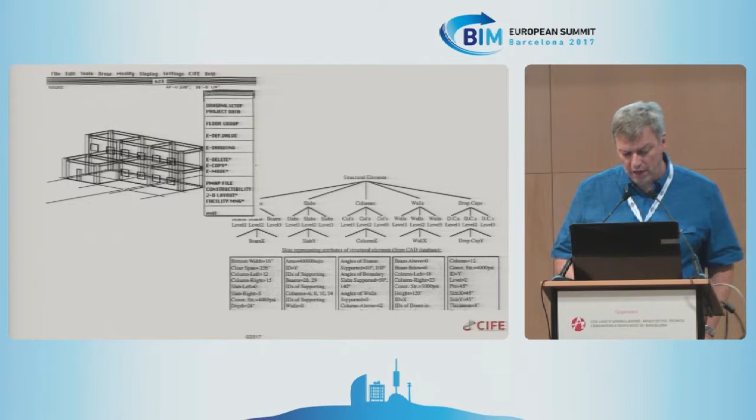We got to work on a real project the first time in 1993, when we were asked to help that hospital project that was being renovated while it was fully occupied. We were able to use a 4D model. So for that we had to build a 3D model, of course, even though the hardware and software was incredibly expensive, $50,000 in 1993 money.

Imagine if you extrapolate that and go to your project director and say, I need this much money to just build some kind of model. People would laugh at you today. But that's what the project manager invested in, and actually in the first sixth of the project, we paid the money back, just from the mistakes we found. So we realized the power of a model and the related visualization to inform a team very rapidly and allow the team to do a better job.

So a few years later, we had a benchmark project in our area. It was the first time, in 2004, that a client, Sutter Health, a company that builds lots of hospitals, said if anybody bidding or wanting to work on this project must work in 3D, share the 3D with all the other disciplines, and must use lean management methods.

Otherwise, do not apply. So that's where the companies realized it was actually beneficial to have people working together instead of making separate models, like the mechanical guy, electrical, etc., bringing them together once a week, finding lots of clashes, having to redo a lot of the work you had done. Okay, it was better than the old way, but it was still a lot of waste.

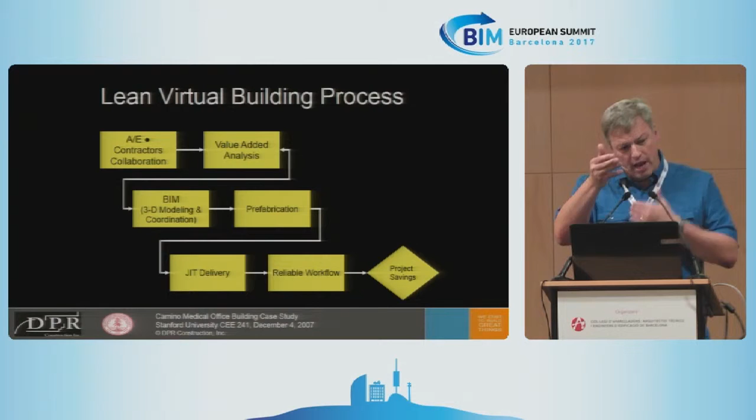So they adjusted the process on this project by having much more collaboration between the design and construction team, this back and forth, which you see with the double-headed arrow on the upper side. And then once the designers and builders were happy with the design, they could execute it very fast because they could fabricate from the model, deliver it just in time, and this led to a much more reliable workflow, which led to project savings.

And this is what the people were really interested in. They were wondering, is this any better? This was a medical office building. There were many of those being built at the time, so there was lots of good reference data, and this project was completed 6 months faster with a 9% lower cost. So people took note. They said, okay, this may be a good way to build.

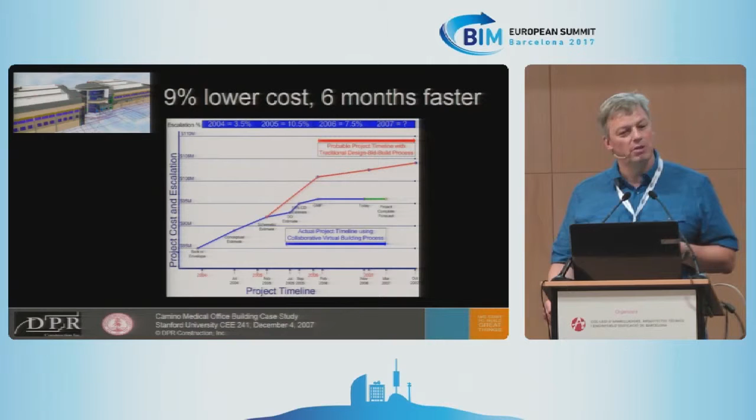This led then to the next project that was done between 2008 and 2012, a hospital. I think this turned into the first hospital in the United States where the client got the entire scope that he wanted, on budget, not for a penny more, and 30% faster than a comparable hospital.

And so this showed for us the power of what we call virtual design and construction, because we have the objectives, the targets that the project team needs to meet from the client perspective, and also from the project team's perspective. They had to make sure that the construction was highly reliable, but that's not just the contractor's problem, that's the whole design and construction team's problem.

If the designer doesn't create a good design, then you cannot have reliable construction. If the designer doesn't finish design during design, you cannot have reliable construction. And so often people tell me, well Martin, this modeling is very nice, very good, but we're in a hurry. We have to start building, so we can't finish the design.

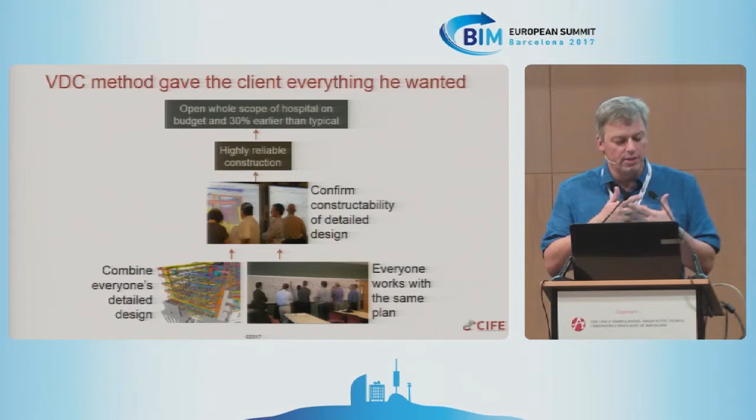Well, this project finished 30% faster than comparable, and they finished the design during design, so that there were basically no changes during construction. So it really required bringing the people together, or the disciplines, when it really mattered, to confirm the constructability of the design and to adjust the process to take advantage of the ability of people to work together, make decisions, and supported by a very detailed BIM.

On this project for the $300 million hospital in 2008, they decided to model everything that was 1 centimeter or larger. Because when they started the project, all the parties looked at each other and they said, so where have we had problems in construction before?

Well, the problems were always with the things that were not in the BIM. The things that were in the BIM, we rarely have a problem in construction. So why would we be silly not to put basically everything into the BIM. So that's what they did.

So this is sort of a very rapid journey that we were able to be part of together with industry, otherwise we couldn't make it happen, from over 15 or so years, to move from BIM as a technology to bring it together with the people and the process and new targets, aggressive targets, which then creates what we call virtual design and construction. So why, in my experience, is BIM so powerful?

This is a case from a project in Germany, Neumarkt, by Max Bögl. It's a mixed-use building in the center of the town. And they were worried a bit about really being able to create a high-performing building. Are they going to reach all of the targets that they set themselves for this goal, for this project, which were pretty aggressive?

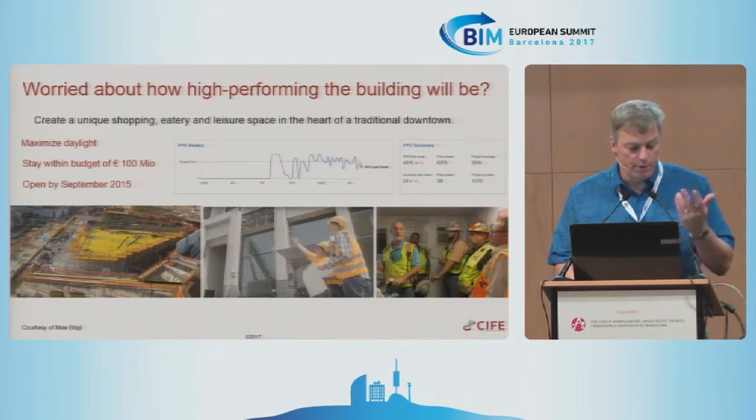So they realized as they were looking at how the project was going that better collaboration could improve the project. That's true almost everywhere in the world I've had the pleasure to work. And then when you look a little deeper, you realize that collaboration is, in part at least, not as good because the project information is a mess.

We've talked about that before. Everybody has their own list, everybody's in a hurry, and then we spend time comparing lists and what have you. And then you realize the project information is a mess because the processes, the workflows haven't really been defined well, or actually not as good as they should be.

So then where should you start improving? You could say, well, start at the root cause, fix the processes. And in some cases that works well, but I found it's really difficult for the people to imagine new processes without having experienced something different. So you could start improving collaboration, because that's what you in the end want to improve.

That's also difficult to do, because why should people all of a sudden work together better, trust each other more? At least I haven't seen that happen. I cannot think of a culture or project where this was the case.

So I have found that starting with the information, starting with visualization is a great way of getting people to work together, start to trust each other, start to solve problems together instead of pointing fingers. Eventually they realize they need to change the processes, and then they're able to do it.

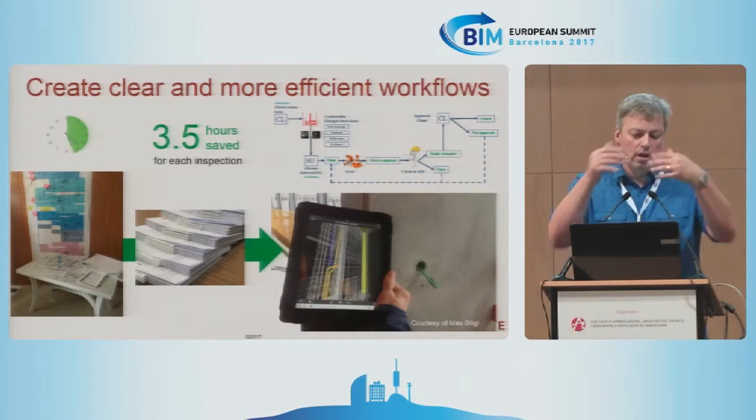So in this project, they started to create shared visualizations to understand, for example, how different options affected the daylighting, and how they would fabricate the project. Through that, they started to work together more, which allowed them to create new workflows and processes that leveraged these tools and started to measure. With that, they saw where they needed to improve.

And in the end, they were very proud of the high-performing building that they had delivered. They were able to create a very high-performing shopping mixed-use project by having gone through this process.

So what you see here was mostly the power of visualization to bring the project team together.

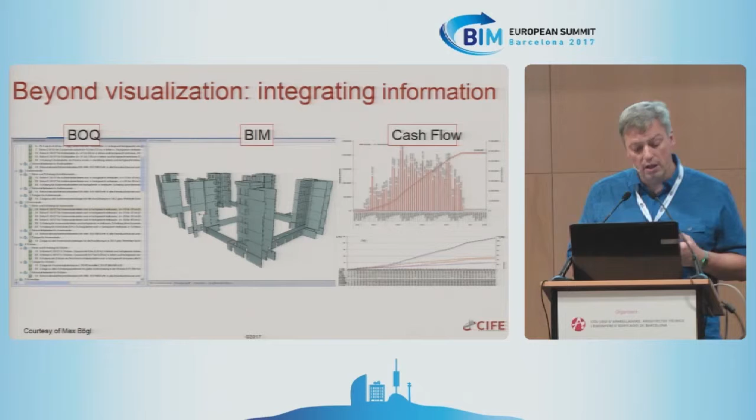Of course, there's more to BIM. They also realized that they could leverage the information in these models to, for example, connect with cash flow. And they also had the idea for another project: once you have a computer representation of your building, you can start to automate it. We saw some examples earlier already. So they created scripts to almost automatically create, for example, a parking garage.

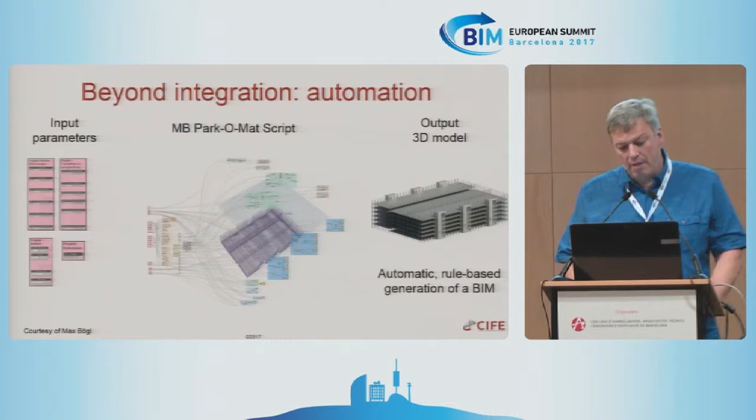So the first sort of BIM, BAM, boom in terms of doing more with BIM is understanding that we have these three types: we have the power of visualization, the power of information integration, and the power of automation. I think on any project today, you should have a strategy for which decisions, which tasks you're going to support with a visual BIM, an information-connected BIM, or with automation.

And so, as you saw, BIM is an essential part of virtual design and construction, together with adjusted processes, bringing the teams together. We call it integrated concurrent engineering in support of project and client objectives.

So we had lots of these anecdotes from projects, these examples, and we were asked by Wiley to write a book, initially on integrated project delivery. We changed it to call it integrating project delivery, to highlight the need for everybody to work on integration—that it wasn't just a thing you could buy, you had to work on it. So we wanted to highlight the active part.

And the book brings together many experiences from practitioners collected by the two authors, who work at DPR, a leading construction company in our area, and Howard Ashcraft, one of the leading lawyers in relational contracts—not contracts that keep people apart, but contracts that bring people together—and then us at Stanford, in terms of the research we've been able to do.

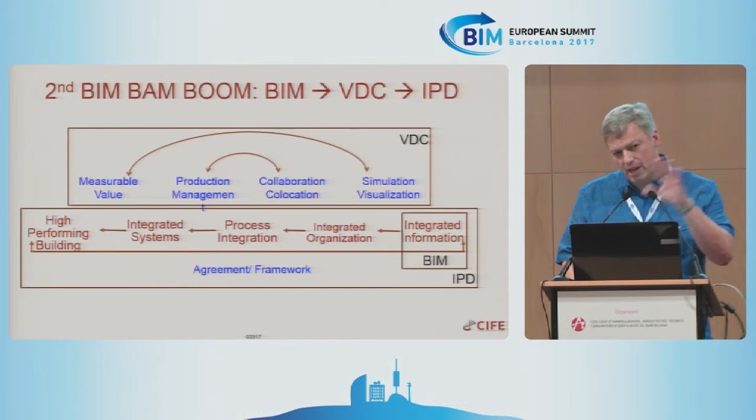So this is sort of the second BIM BAM boom: from BIM to VDC to IPD. Because you have IPD, right, represented here, and if you look carefully on top, the methods, they are all the methods in virtual design and construction, the definition of the objectives, the collaboration of the people, and then the revised, better managed processes and the information on the basis, the simulation visualization on the basis of BIM. So hopefully this allows you to connect these acronyms a bit more.

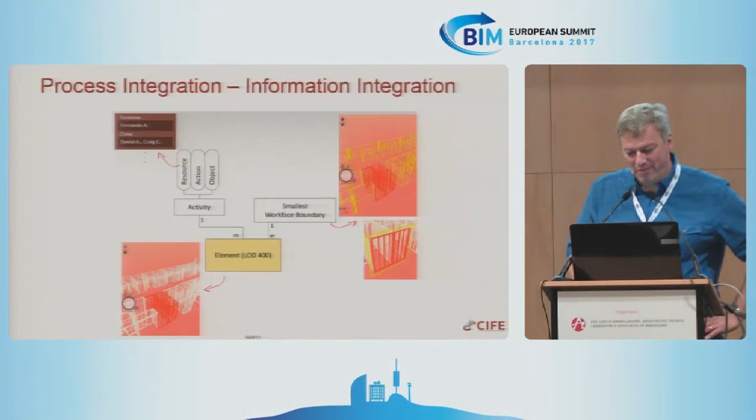So I think I should just jump through this section fairly quickly. I was maybe a little aggressive in what I could cover here in a few minutes. I will just jump through this. Never mind. I'm happy to talk to you afterwards.

Just to wrap up, what really guides the work we do at Stanford is these two statements. One is the business perspective: the automated execution of process changes everything, which was actually a statement made in 1961 by Alan Perlis, a computer scientist from Carnegie Mellon. And the other one, a little bit longer, the scientific perspective.

Stated by Donald Knuth, a Stanford computer scientist, in 1974: science is knowledge which we understand so well that we can teach it to a computer. And if we don't fully understand something, it is an art to deal with it. Since the notion of an algorithm or a computer program provides us with an extremely useful test for the depth of our knowledge about any given subject, the process of going from an art to a science means that we learn how to automate something.

And this is what I have found so fascinating in the last 30 years working with companies, trying to automate things that so far have been an art. And trying to do that really establishes the boundary of knowledge that we have. There's still going to be, for many years, a lot of things that are an art in terms of engineering buildings, but many more things we can make more scientific, automate, and apply more widely, more consistently, more rapidly. I think this is really the task we have in the next few years, collaborating between academia and companies.

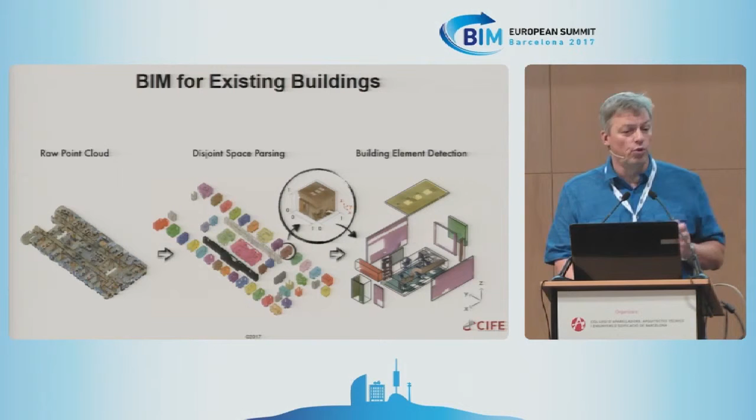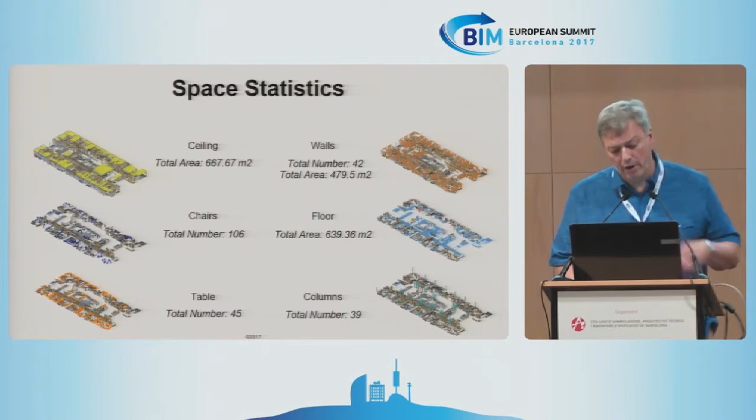So you can go automatically from a laser scan to a simple BIM where, for example, it will tell you how many chairs you have on this floor. Or you might want to know some more useful things, but you can get wall area, etc., all of this automatically from a laser scan using computer vision, pattern recognition, machine learning methods. And so then you can quite quickly change an existing building, try out different things, for example, taking down a wall, which would be a bit time consuming, but here it's just a click, and then you're done.

So all of these methods, I think, are really critical for us to employ very soon, because, as I already said at the beginning, this is really just the beginning of more and more technologies and opportunities from it. You all hear every day about opportunities from mobile, cloud-based computing, parallelizing processes, location measurement methods, machine learning, robotics, additive manufacturing, Internet of Things, virtual environments, collaboration, lean management. These are all in the newspaper every week, every day sometimes, and this combination—any one of those will have a big impact.

It's really the combination of these developments that creates huge opportunities, but we cannot harness them if we don't have a formal representation of a building like a BIM. So my vision for the future of the industry is that every work hour builds the right product safely and productively. This is pretty challenging, but we have BIM to represent the product, we have BAM to represent the building assembly, and then we have BOOM in terms of the operation, to have the right building, right for the user, right for the environment, etc.